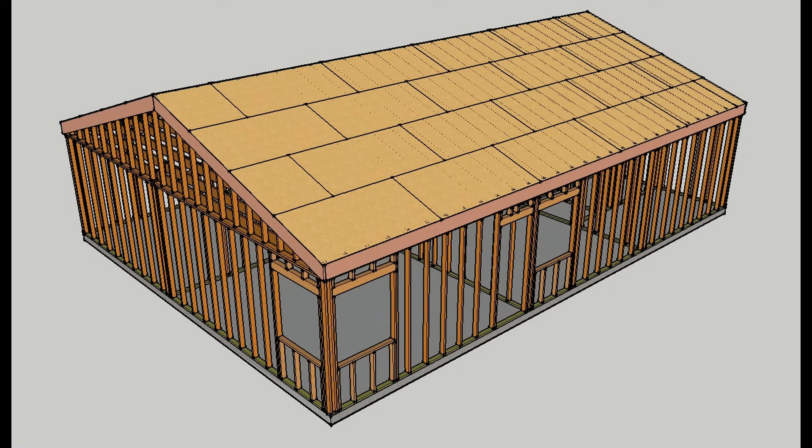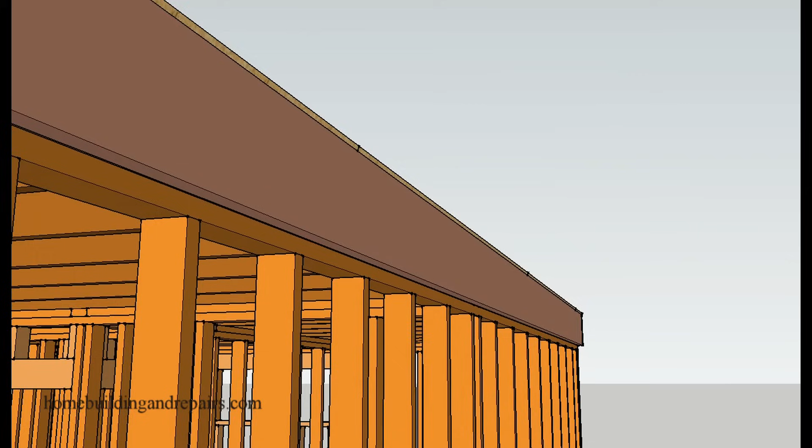Here's an example of a home that does not have a roof overhang, and this is a common architectural style for a Mediterranean design. So I received an email recently. They wanted to know how in the heck they could extend the roof overhang, and I thought that would make a good video.

First up on the list, we will need to figure out how much of the roof sheathing we will need to remove. And this would all depend upon the length of the rafter, and I'll get into that in a little bit. You might only need to remove 2 feet of the roofing, and you might need to remove the whole sheet or even a little more. And then, of course, you will need to remove the fascia board.

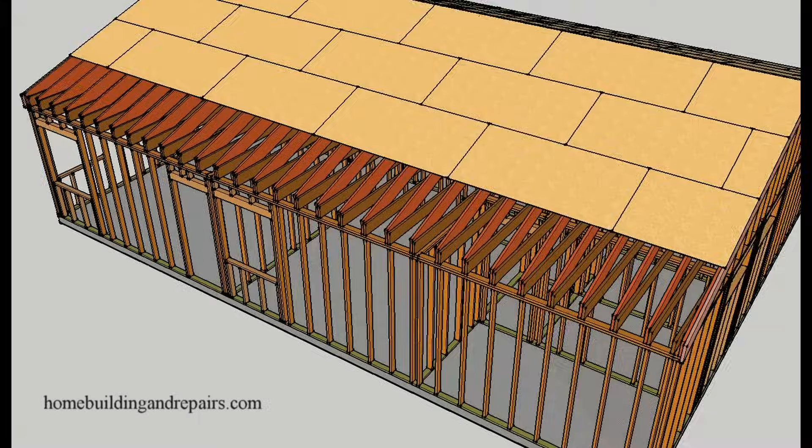Now, there is something I'd like to point out. You could actually do some of this from the inside. You could actually remove the drywall from the ceiling or a section of the drywall, and then work below, leave the plywood or the roof sheathing on, and then work on the inside and the outside of the house.

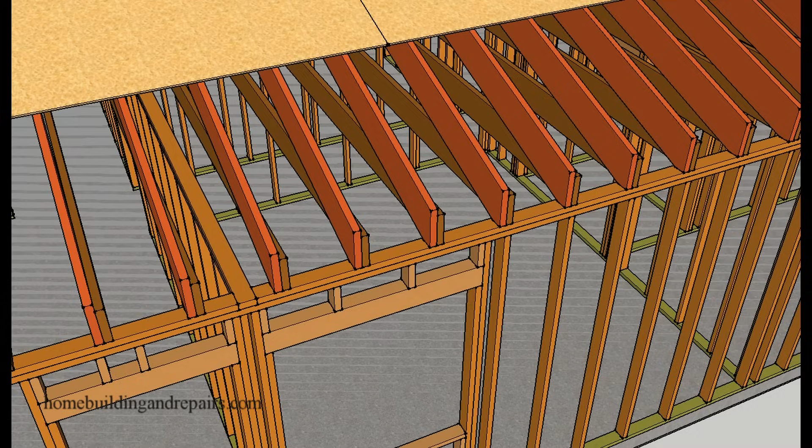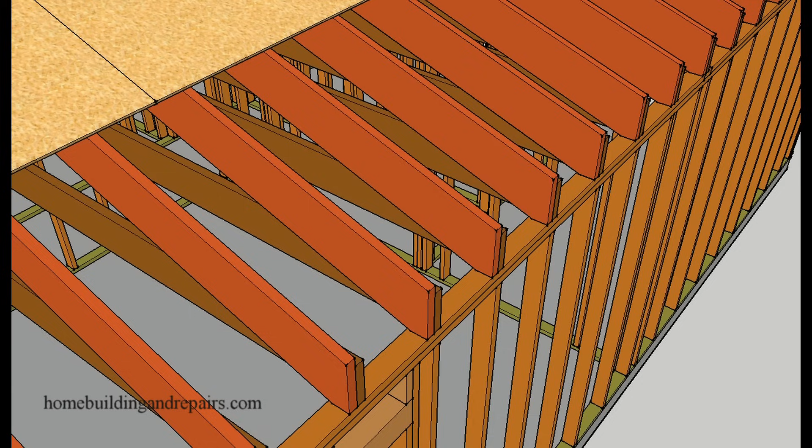So basically what you will start with would be some type of a rafter like this or a truss. The information I'm going to provide you with in this video should work on a truss in an engineered roof system as well as a conventionally framed system with individual rafters. Next up, we will need to figure out which type of method we are going to use to extend the rafters, and I'm going to provide you with 4 examples.

First thing I would like to point out is that the cantilever on the rafter that you are going to use, or the rafter tail here, would be 1/3 the distance, just like figuring a regular cantilever. So if you're going to have a 2-foot cantilever, then you need to go back 4 foot minimum here. And I'm not a structural engineer. I'm just trying to provide you with my best guess at something that would work or should work for that.

But the materials that you use might make a difference also. If you have a heavy tile roof, and I've seen this before where they have 2x4s with a 3-foot overhang, that's probably not going to cut it. If you have a tile roof, you might need to go with a 2x6 or a 2x8. A wood shingled roof, a roof using lighter roofing materials, you might be able to use a 2x4. If not, you're going to need to use something bigger. But I'm going to leave that up to you. This video is just giving you some examples of things to do, not providing you with a method that will work under all circumstances.

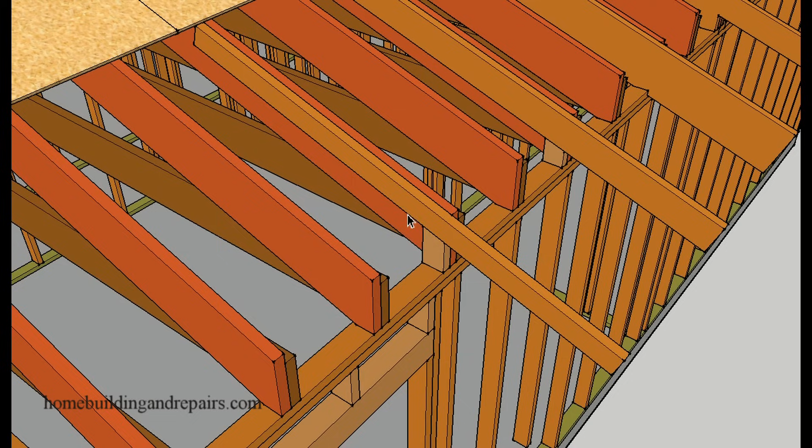Here I have a 2x4 that's going to nail onto the rafter or the truss. Use 16D nails, and I would imagine 16 inches on center. Staggered nailing would be good, which would be a nail here about an inch, inch and a half from the top, 16 inches, 16 inches, and then of course go to the bottom, but start in the center. So in between the 16 inches, if you put a nail here and the next nail 16 inches, you're going to want to start your lower nail at 8 inches. This would give you a staggered, kind of like V or W-shaped pattern. And I would imagine that would be okay also.

Take a look at it from the other side, and back, to give you a better idea there.

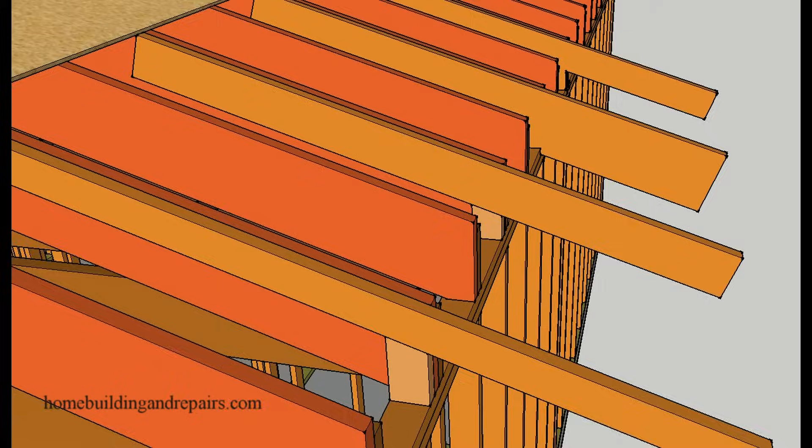This would be an example where you're using a 2x6, something larger, and then just cut a shaped block underneath it. You can probably just nail a rafter on here, and then of course have the block you use here go under. That would be fine. I think there are different methods you could use here. I've seen people just nail the rafter extension onto the rafter, and they don't put a block in here. But I think that for structural purposes and the amount of time and the cost, this is going to provide you with a pretty good method for doing this.

I mean, my only problem I have is you nail something like this and then you put the sheathing on. The sheathing is going to kind of help hold this as the weight wants to push down and it wants to push this up. And the sheathing is going to kind of help with that. But once you get over here, you could actually have a separation where the rafter could sag if you didn't

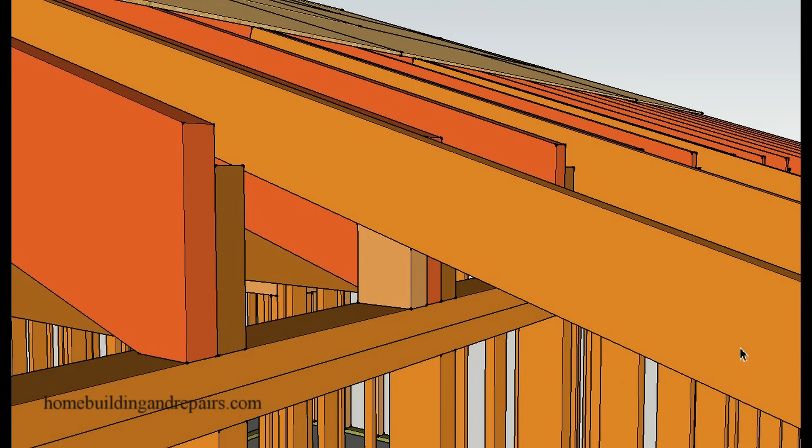nail it properly or if there was too much weight. I hope that makes sense, where it could actually push down. So I think a block right here would be a good idea. View from the other side there.

Next up on the list would be a rafter that would be the same size as the rafters you're using. If it was a 2x4 truss system, then a 2x4. Now you are going to have a problem if you have a tile roof with 2x4s and you need 2x6s for the rafter extension. Probably not going to work. This would create another totally different nightmare.

So there are going to be some situations where you're not going to be able to use the examples that I'm providing you with in the video, because if you need a 2x6 and you only have a 2x4 here for the truss, so you only have 4 inches, let's just say the distance from here to here is 4 inches, then obviously you're not going to be able to put a 2x6 in there. This would actually require a seat cut.

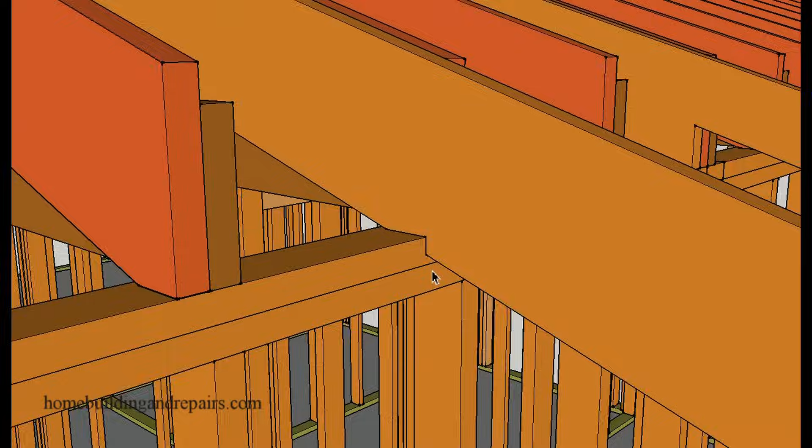So you would just cut a little notch in the rafter to fit, and this would be a pretty good way to do it. If you have 2x6 rafters, use 2x6, and this would be the perfect method. This would be another method. Let's just say that you have 2x10 rafters, and that's not going to be uncommon if you have a vaulted ceiling or a cathedral ceiling.

You would need 2x10 rafters, or rafters at least 9 inches thick to fit the insulation that's required nowadays, which would be an R30, or I should say a while ago. Who knows, those laws or rules could change by the time you're done watching this video.

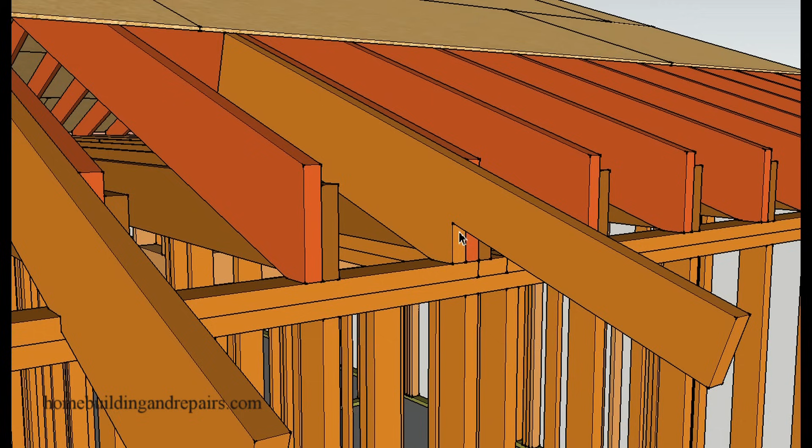If that's the case, and you want to use a smaller fascia board, if you have a 2x10 rafter, you're going to have to use a 2x10 or a 2x12 for your fascia board. And that might not be the look that you want. And if that's the case, you'll need to cut a rafter like this and notch a rafter tail. And again, remember, these are just examples.

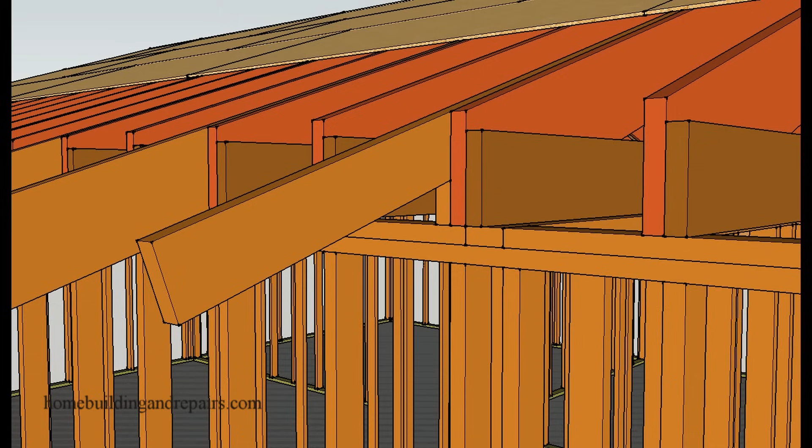I would imagine each one of these situations would work as long as you don't have too much weight on the overhang. So I would imagine the examples I'm providing you with for a 24-inch or less roof overhang. Next phase of the project will be to attach your rafter extensions to each rafter.

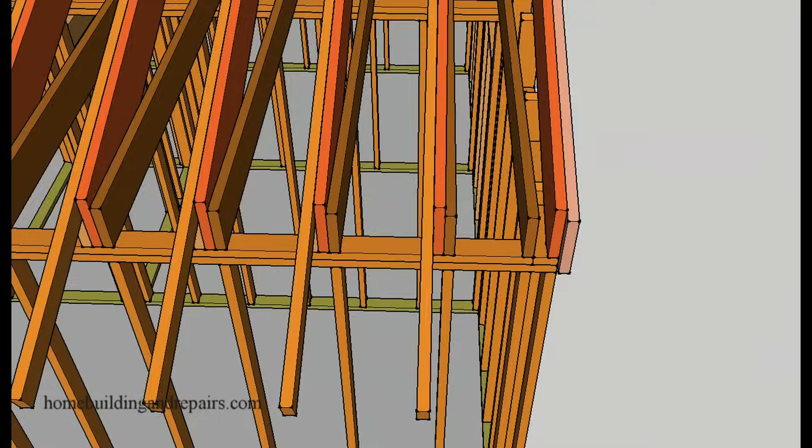Run it all the way down, and again, whatever type of rafter overhang method you choose to use, you can use, and just do a repetitious pattern there. Next up on the list, you will need to nail some blocks to brace up the rafters or the trusses and create a nice solid structural connection there.

So these blocks are actually going to provide you with a few different things. They're going to keep these rafters and ceiling joists from leaning over. Sometimes they want to twist over. That's not good. I've seen them actually pull quite a bit. I've seen a 2x6 turn at least 1.5 inches. That was just unbelievable one time.

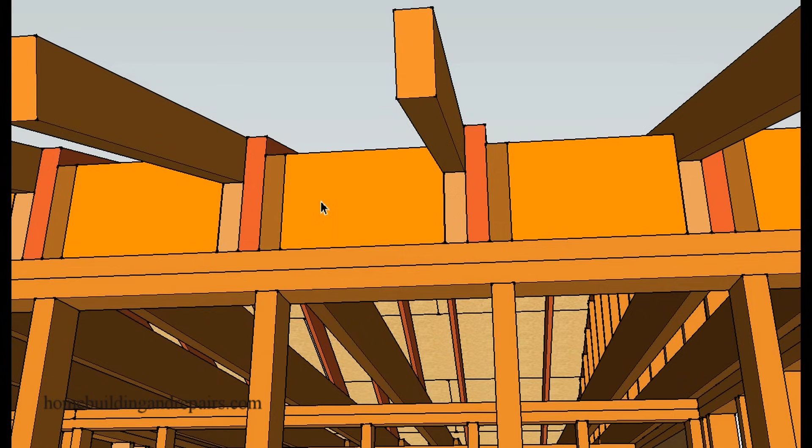So blocks are good. And the blocks under here are going to provide you with nailing for whatever you're going to use to finish the roof on the wall. If you have stucco, then you're going to have to add some stucco, add some siding, or you can actually put a soffit under here also.

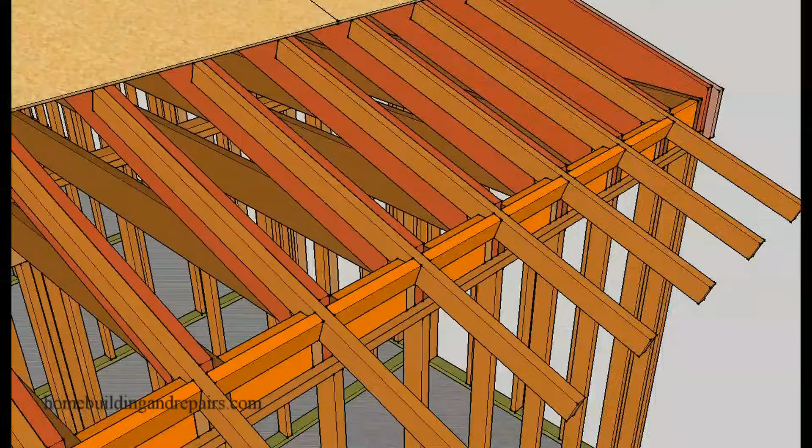Next part of the project will be to install these blocks, and these blocks will be more decorative, but they can also prevent the rafters or the rafter extensions from twisting and turning, as mentioned earlier. Give you an idea what the connection looks like here.

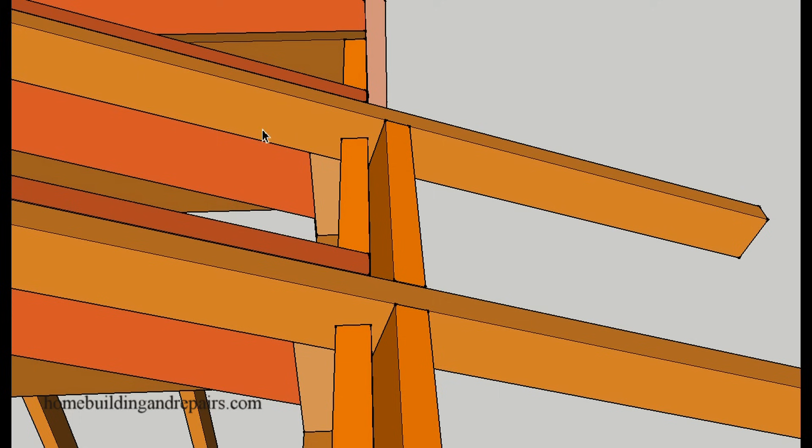So we're going to have a block here that's going to be vertical, I should say, parallel to the wall. And then of course this one here will be angled. You don't have to angle these blocks. This is just a common construction method. You can put the blocks

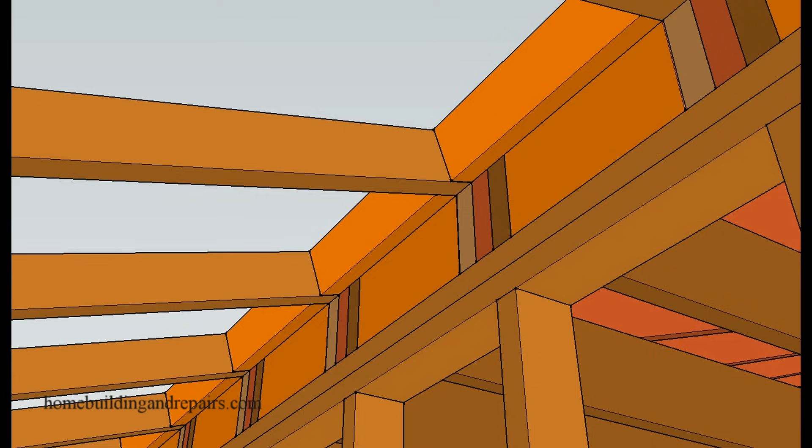parallel to the wall also, but this right here provides you with another form of nailing the plywood, the roof sheathing too. Take a look at the bottom of the block, and this kind of will give you a finished look. And again, you're going to see more of how all this comes together in the next video or the video after that. I don't know if this is going to be a 2 or a 3-part video.